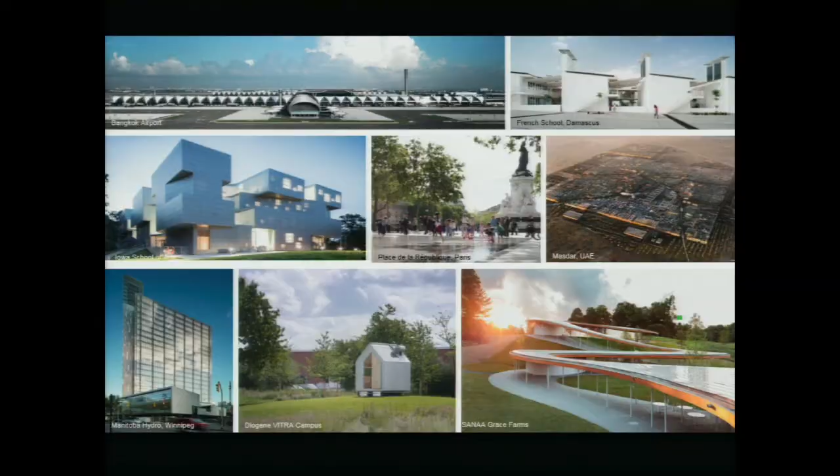Just to give you an overview of an array of projects we've been involved in - some of you may know some of them. Very small projects, like that little building at the bottom, which I designed together with Renzo Piano for Vitra, only 6 square meters. The idea is you can do everything in this: it collects its own rainwater, heats it up, produces its own electricity. You can sleep in it, work in it, it has a little kitchen, a bed, you name it - all on 6 square meters.

We have built several prototypes, but the idea is that Vitra is going into series with this product. They typically build chairs, so they consider this kind of furniture, rather large furniture of course.

From very small projects to very big ones - Masdar City, most of you have heard of that. Kind of controversial, and I'm not going to talk about that, but really the questions we addressed were how do the winds go past or through the city, questions that have to do with street width, urban layout, building height, orientation, solar radiation hitting various aspects of the facades, interaction with daylight, and of course how you can produce sufficient energy in that city and integrate that production to operate it.

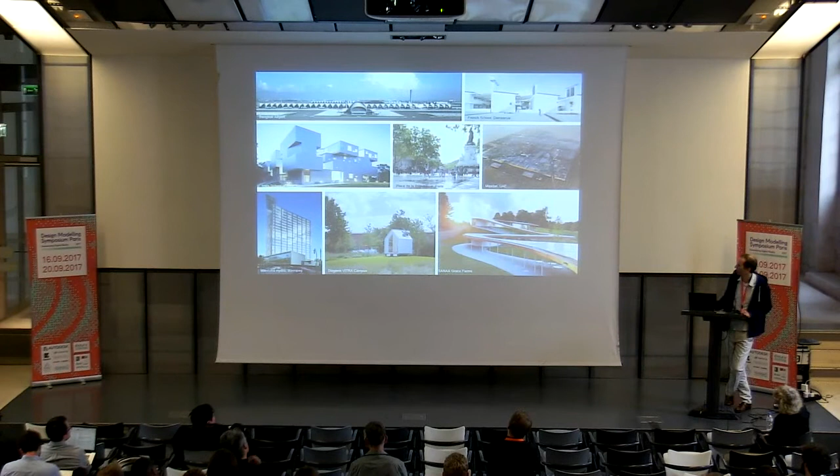Well, while we have only a very small stake on every project, we are involved in a lot of projects, but not enough. We have a mission to make buildings more sustainable and energy efficient. And because we can be involved in only so few projects, rather than spreading the message into the world, we decided to get what we call the majority world to Transsolar, and founded the Transsolar Academy.

It's basically a scholarship for 6 to 7 young engineers and architects who stay with us from all over the world. They come to us every year for a whole year, fully funded. This year we have a guy from China, a girl from Cuba, Greece, Argentina, South Korea, Syria, Zimbabwe, Vietnam and India, and it's very inspiring to work with those people.

I just had a session with them last week about their future, and whenever I have a philosophical question, for instance about models and tools, I have very interesting discussions with them. Not only do they have very different cultural backgrounds, but also different backgrounds in terms of education - some of them are engineers, others architects.

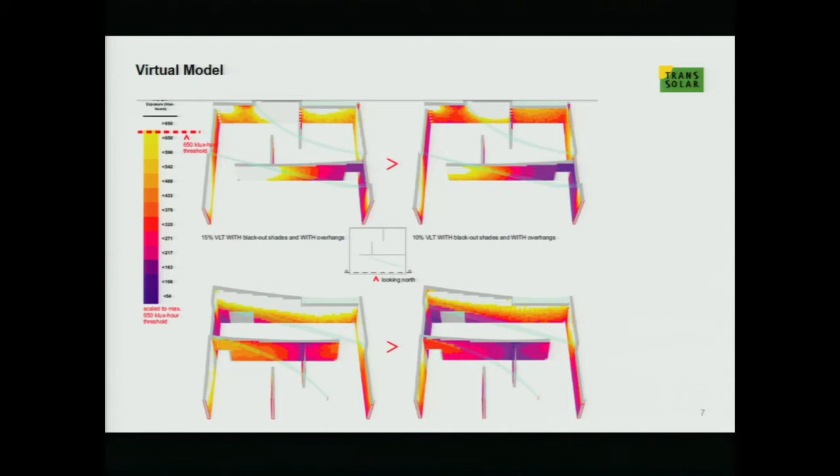So we often ask ourselves, should we do a physical model or a virtual model? I personally have a more virtual background. In fact, the world of aerodynamicists is divided into physical and virtual, and you rarely find someone making a living with both - wind tunnel and computer work. With those guys, we have discussions about what models are appropriate, and we've kind of agreed, at least in aerodynamics, that there's some coexistence between computational tools and people who pursue computational tools as opposed to physical tools.

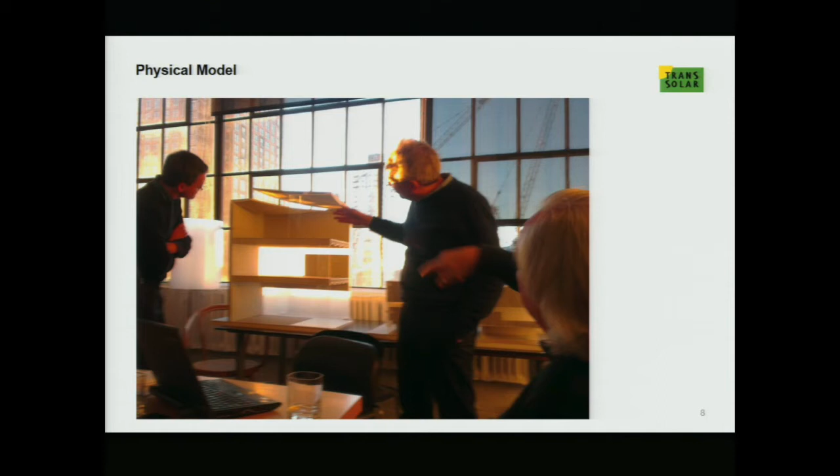So this is an example of a daylighting study in a museum - a museum in Houston with Steven Holl. Of course, you cannot replace a physical model with only computational consideration. So in particular for that museum, we are building a 50% mock-up. These are early days, just holding a model against the window, learning from the very simple interaction with the sun.

So finally, I can show you a real photo of what you see on the left, a model. I've been showing this for the last 3 years, only the left picture, but last week the Zaryadye Park in Moscow was opened.

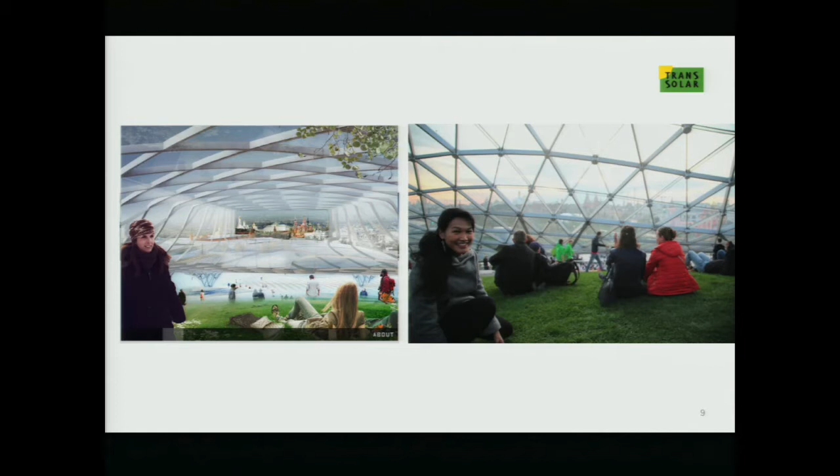It's a park similar to Tianjin that you just presented. We thought about the climate a lot, how people will interact with the environment. Moscow, of course, has a very harsh climate, especially in winter. So we wanted to play with this, create super climates, anti-climates.

There's an ice cave actually, operating the entire year. The vision was really that there's a hill, and on top of that hill, we have a shelter. It's open, accessible all year round, and even if it feels cold outside, it feels warmer on top of that hill. We know warm air rises. I'll talk about this a little bit later.

But to get from that vision, that notion, that mental model, to a real building, a lot of models probably have to happen in between. And that raises really the question: what is a good model?

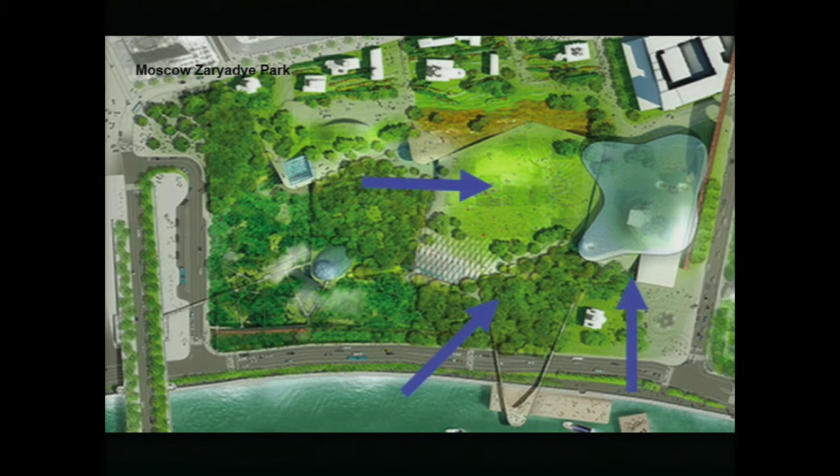So it's very, very central in Moscow. If you ever have the chance to visit, already on opening day it was treated a little bit controversially. Of course, it's an outside park, a park for the people. But of course, from an urban point of view, it's also very brave to actually build something like this.

But this is a rendering. So we looked at the winds, the prevailing winds mostly coming from the southwest, but also west and the south. And you can see here on the right-hand side this huge canopy, around 15,000 square feet.

On top of a hill, under that hill, there's a Philharmonic. Under that Philharmonic, in fact, under the entire park, lies a very, very big secret. No one knows what's under there, me neither.

Anyway, so there's a topography, and we try to understand really how the winds will interact with that topography. That was kind of the original idea.

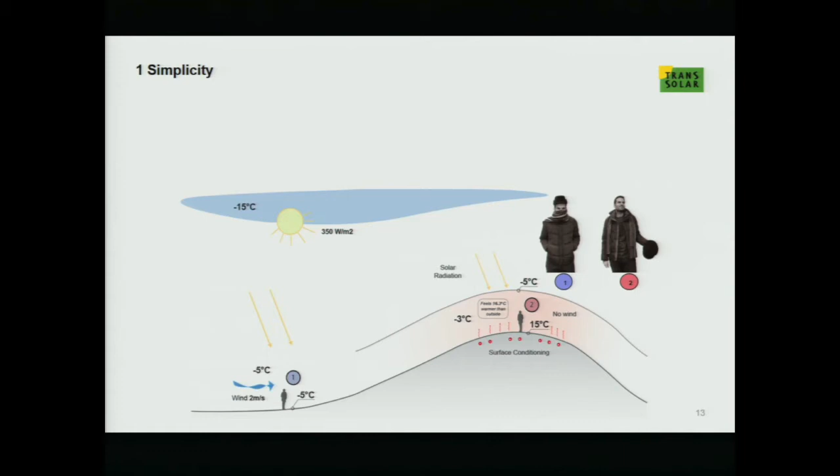So imagine you're outside, it's fairly cold, maybe minus 5 degrees. You walk up that hill, the sun traps solar, the canopy traps that solar energy under a glass crust, like a greenhouse basically. And as air is rising up, in the shape of the bubble, that warm air cannot escape, unless, of course, we have wind taking that away.

So the key was really accessibility, not to close this off, to have this an open kind of structure. Originally, we intended to also find some waste heat from the Philharmonic to maybe also introduce into that space. But right now, this is only passively heated.

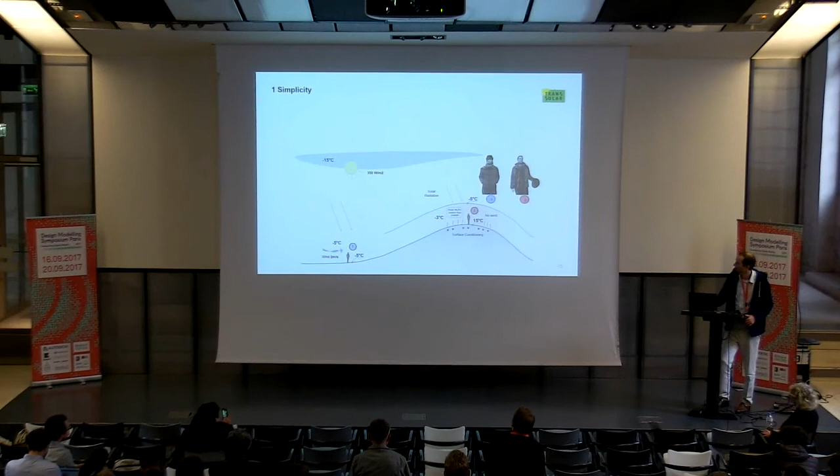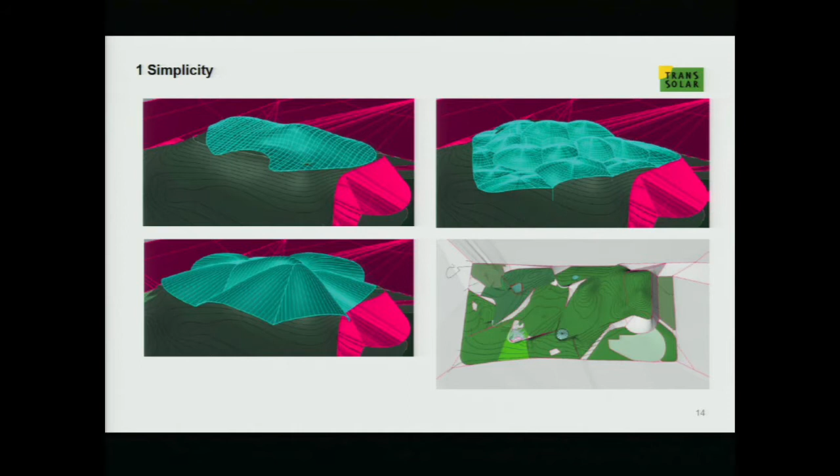So the architects came up with all kinds of different shapes for that hill, shapes for the canopy, and asked me what's really the best to achieve our target of having a wind-sheltered, open greenhouse.

So we did what you then always do. You do some CFD. It takes for each of these a couple of weeks of a highly paid CFD engineer, and then you look at the results, and really you didn't learn much from this.

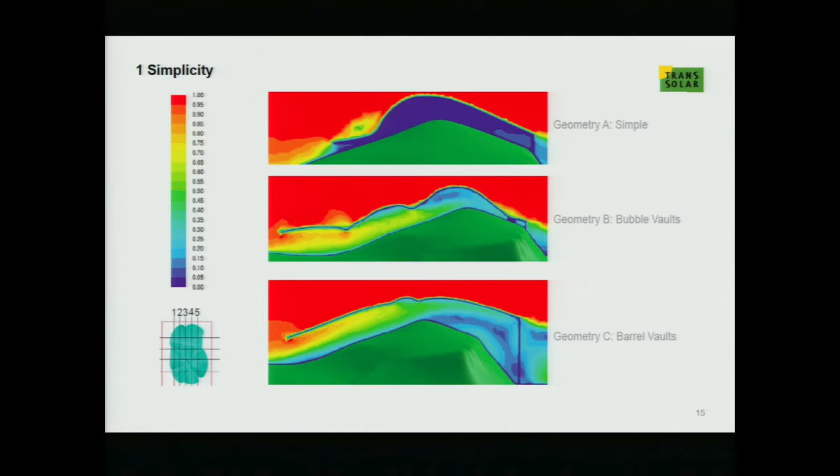So what does this mean? It's maybe the simple geometry versus the bubble vault or the barrel vault. How should we interpret these results? How can we develop them further?

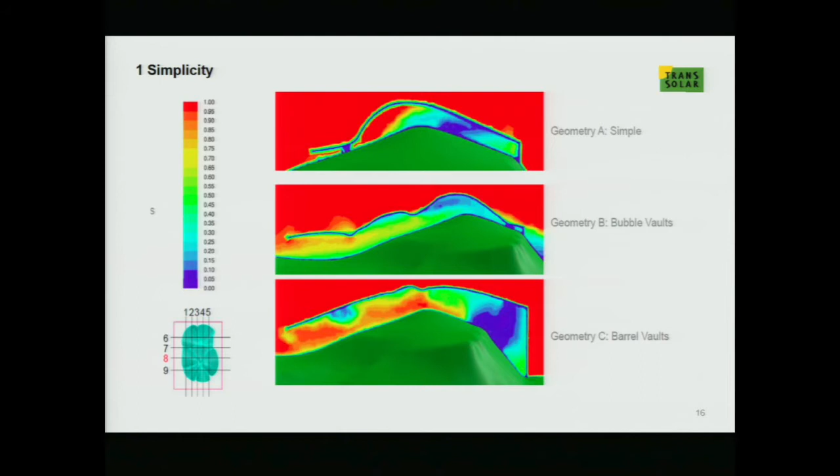Especially if the wind turns a little bit, even if we could make sense of this, even when the wind turns slightly, the situation may look totally different. So rather than sticking to this complex idea that we need to solve a certain future reality, we ask ourselves, okay, can we reduce that complex model to a more simple approach of addressing such a canopy?

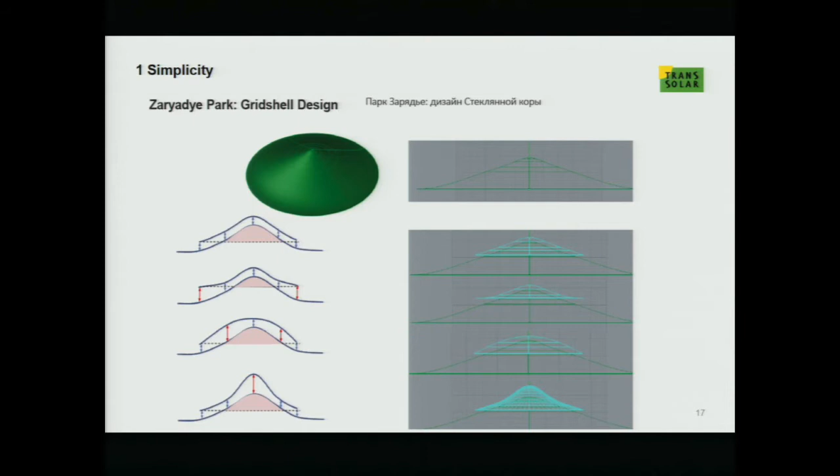And we did that by introducing a cartoon-like hill to begin with. So if you ask a child to draw a hill, how would this look like? And then we started by just defining a canopy that's parallel to that hill, and then came up with a set of parameters, only 3, not more, to understand really the relationship between such a canopy and a cartoon-like hill. So probably the edge is relevant, where the wind could enter, but maybe also the top of the hill where the wind could disperse, and maybe somewhere in between.

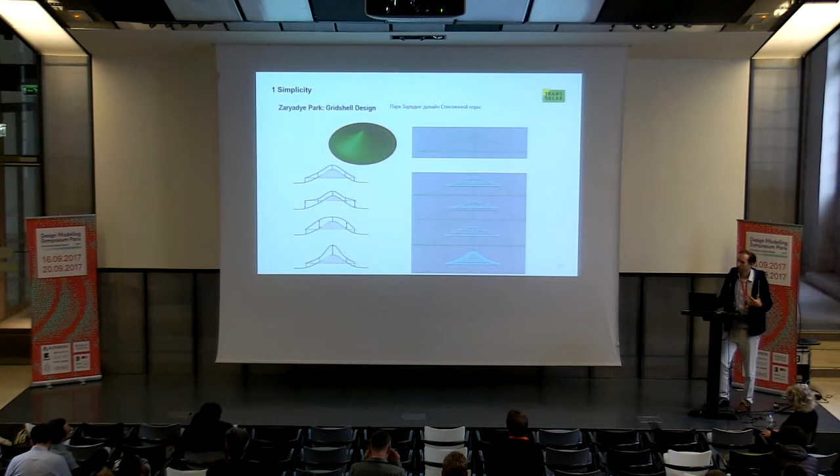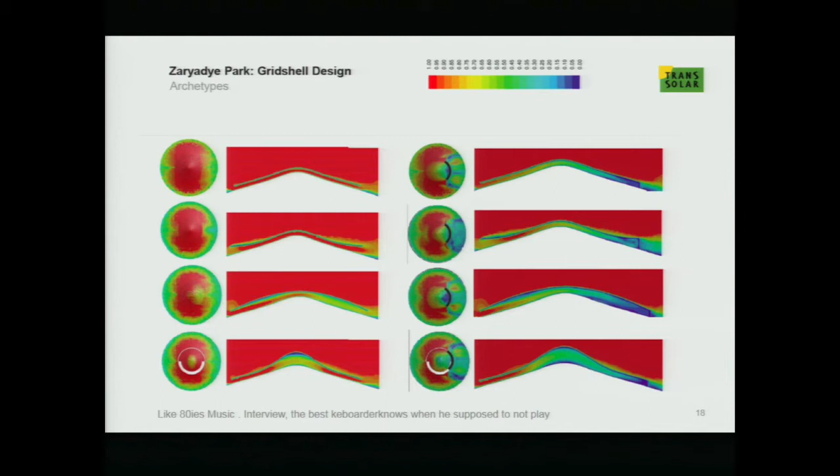So it's a strategic decision to reduce the complexity of such a model into something that not only we can handle, but also learn something from it. And then you come up with certain rules, let's say design rules, rather than facts, that the architects would be using to shape their canopy.

So only then, actually, after understanding the dynamics of the wind, after feeling comfortable with what's happening to the wind, we ask ourselves, what does that actually mean for people finding themselves under that canopy?

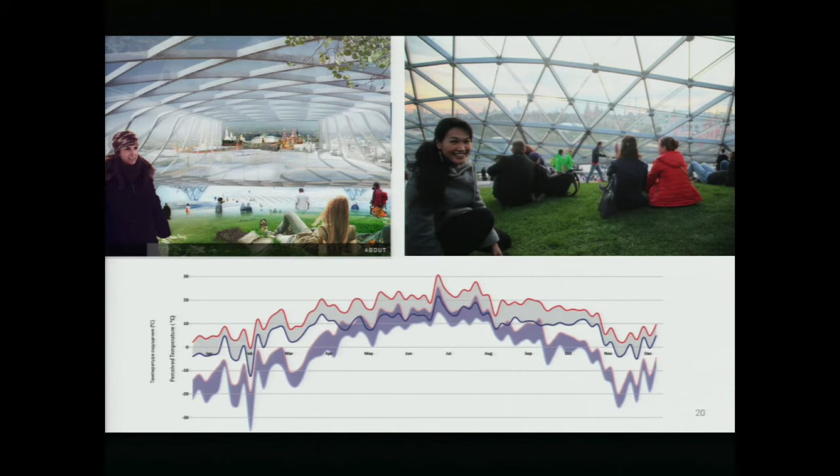Of course, it also has to do with other factors: humidity, sun, what people are wearing. The fact that they're actually climbing up a hill will make them feel even a little bit warmer. And then we take all that information into one human thermal comfort model, and try to understand what the perceived temperatures under such a space could possibly be. So the purple colors, that's more outside, whereas you then have the elevated temperatures under the sheltered space.

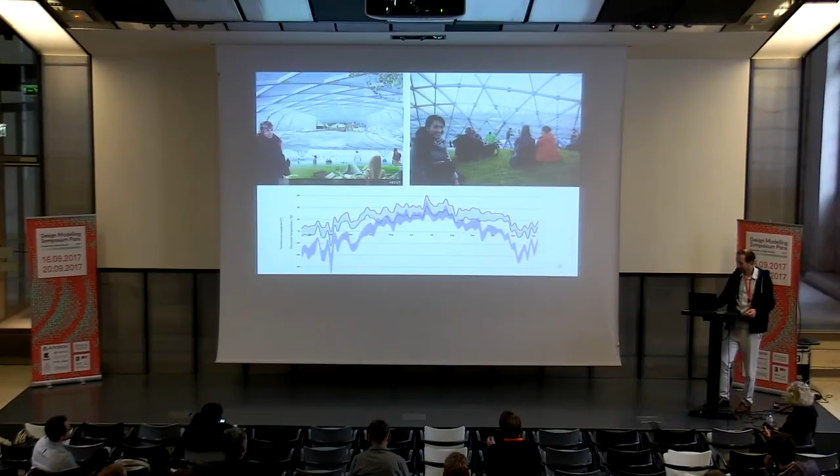Simplicity can also be found, I think, in this model. It's a model, it's an installation that we've done with a Japanese architect, together with Sanaa, in 2010 at the Biennale.

The idea was to create an indoor cloud. And little did we know at that time that what we were going to create was actually not a cloud, but, I think, a model of a cloud. And I want to show you why I think that is the case.

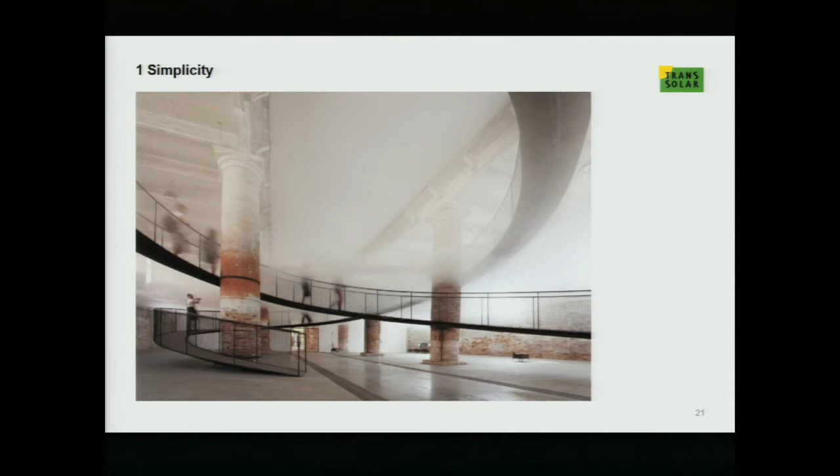So normal clouds, the ones that you fly through in a plane, are of course three-dimensional objects. So they have a complexity that meteorologists like to refer to in cryptic coding using complex Latin categorizations, in order to assign them to different weather phenomena. It has to do not only with humidity, but also pressure, air movement, winds. We all know how difficult it is to predict the weather, let alone to model it.

So in that sense, what you see here is a simplification, in the sense that it's actually only a one-dimensional cloud, in the sense that the atmosphere changes only as you go up. So the idea behind that is you still have a warm and humid layer of air, and a cold layer of air, and as they interact with one another, droplets start to condensate and find themselves balancing in a certain layer. It also has a little bit to do with the fact that humid air rises, humid air is actually lighter than dry air. I will talk about this also a little bit later. So it's a very much reduced, static model actually of a cloud.

You also know that clouds are very transient phenomena, so they change continuously. The idea here was really to have a stable layer that's floating, a stable humid layer floating between two rather dry layers.

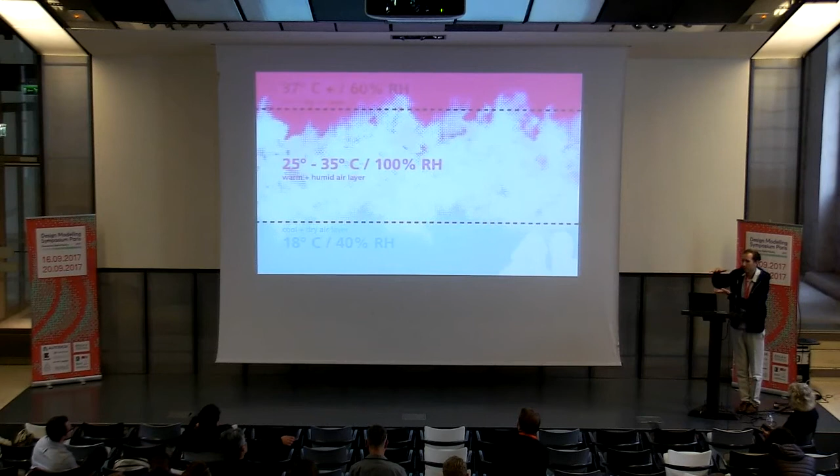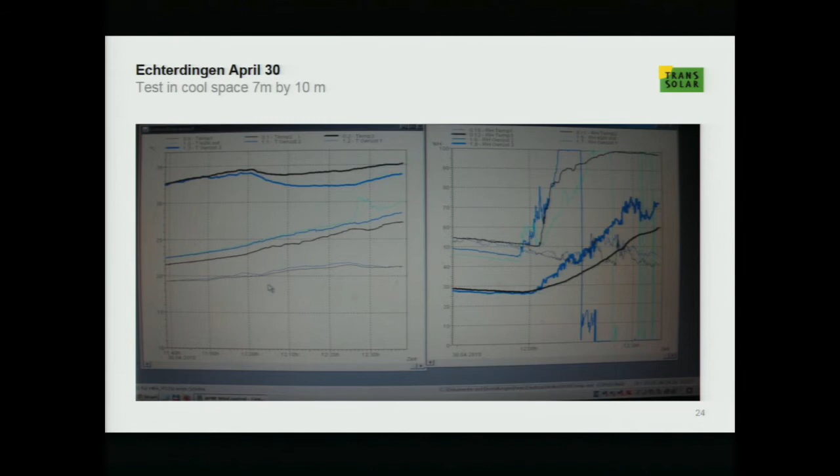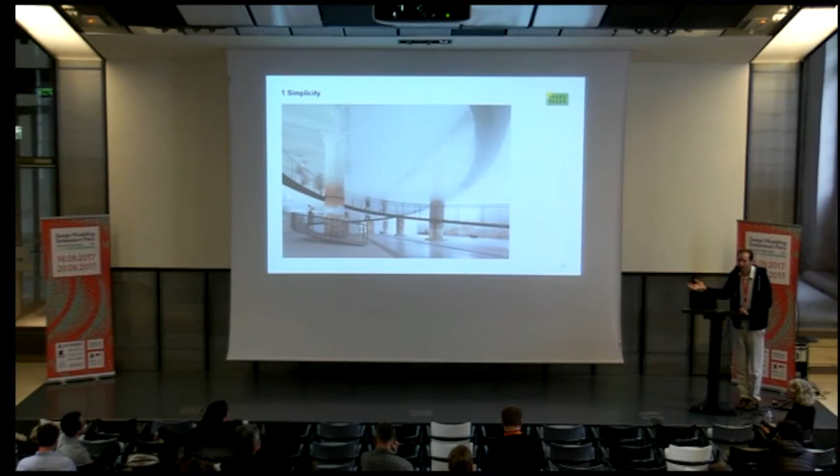So, as I would say, a physical model, physical representation of something that we know from reality.

Here, a virtual context. That's the Academy Museum of Motion Pictures, currently in design with Renzo Piano. Actually, they already started construction. Parts of that are being renovated. That round bubble is a new build. It's actually a movie theater.

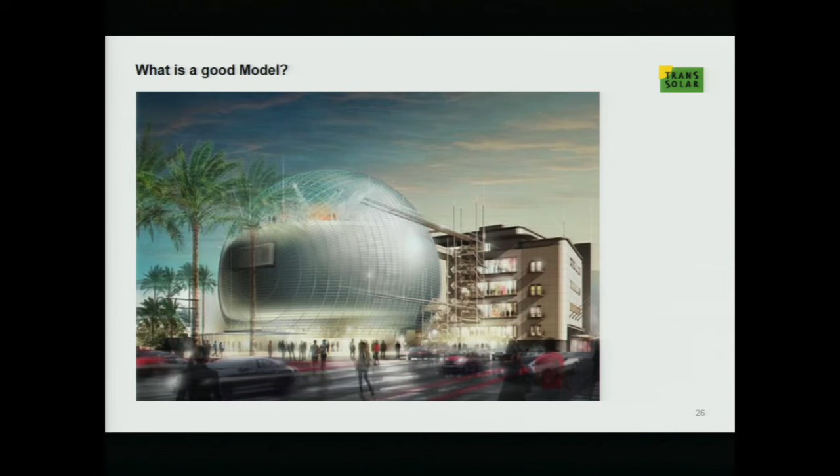At the bottom and at the top, it's somehow similar to the park in Zaryadye, an outdoorish, let's say, buffer space that's protecting people from rain and wind, and maybe from cold, but it's not fully enclosed.

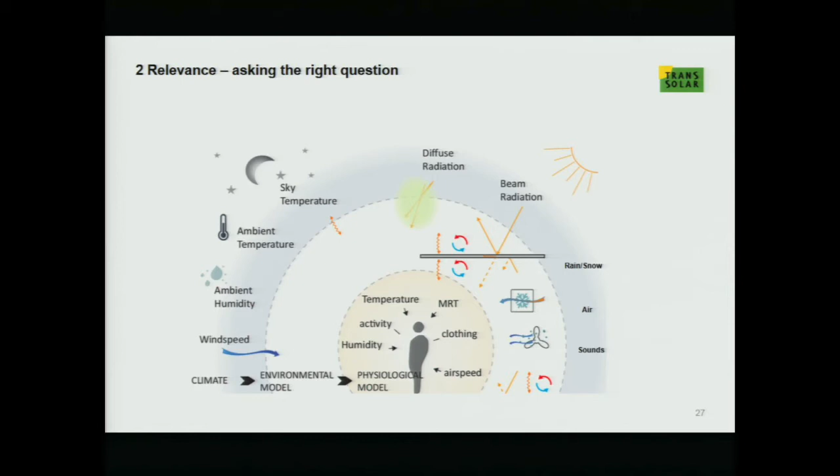And that brings me a little bit to what I think is the second aspect of what makes a good model, actually, which is asking the right question. And the right question here is probably not how can I build an enclosure, a fully enclosed space, in order to satisfy the needs for people, but how can I actually achieve thermal comfort for people. It doesn't necessarily have to be a fully enclosed building.

Actually, I keep being asked for the non-building. A lot of architects like the idea of a no building or zero building. Those are the aspects that are really important to understand what makes a person feel comfortable in a certain environment. Whether that's outside or inside does not actually matter so much.

I actually think if a person can relate to the outside, there is a mental shift happening that will relax people more and adapt them to, let's say, a wider range of environmental parameters. So, but it's not just wind; it's also something most people do not know.

It's, for instance, the temperature of the sky that's surrounding you. The sky has a temperature. It's actually the temperature of the atmosphere, but you can think of this as a surface, typically colder than our air temperature. And of course, air movement. You know all of this from your own experience.

So also here we did some CFD modeling. Not only CFD modeling, different models. Again, simplified, reduced models in order to understand the interaction with the space, in order to really understand the relevance of the key question, which is thermal comfort. Not how big does the chiller have to be. What is it actually? What kind of comfort do we want to achieve? And can we question that comfort actually?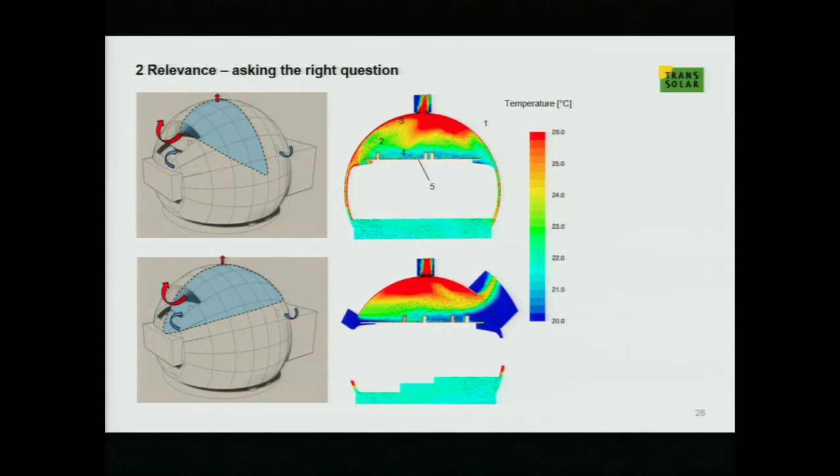So to come back to the cloud, what are the relevant questions for a cloud? What can we gain from a physical model such as a cloud?

And because we were interested in that concept of perspective, being below, in between and above, we at some point realized we want to take that question a little bit further, because actually there are very few situations where you can see all those three moments at the same time, because you're either under the cloud, in between the cloud, or above the cloud.

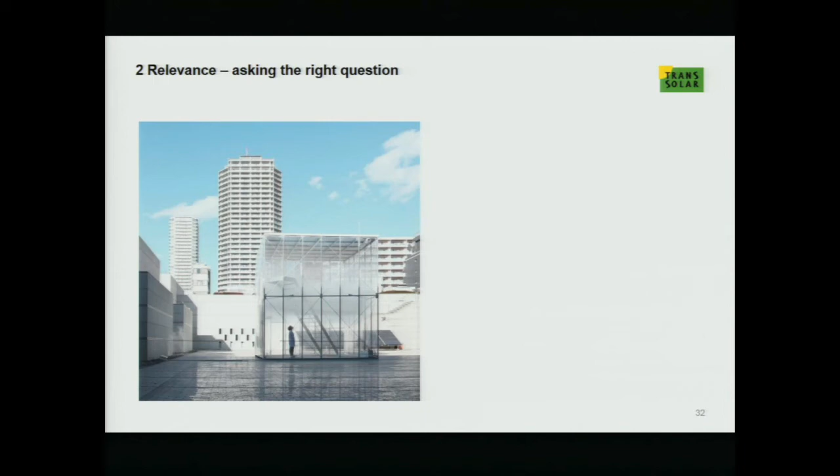So you know this from probably when you're, let's say, in the mountains, you can probably experience also seeing all three layers of cloud as the cloud is farther apart.

So I think this is an interesting moment that you experience here in Tokyo, where we did, let's say, an alteration of that installation, where it's enclosed in a box, where from outside you can actually see all those three layers at the same time.

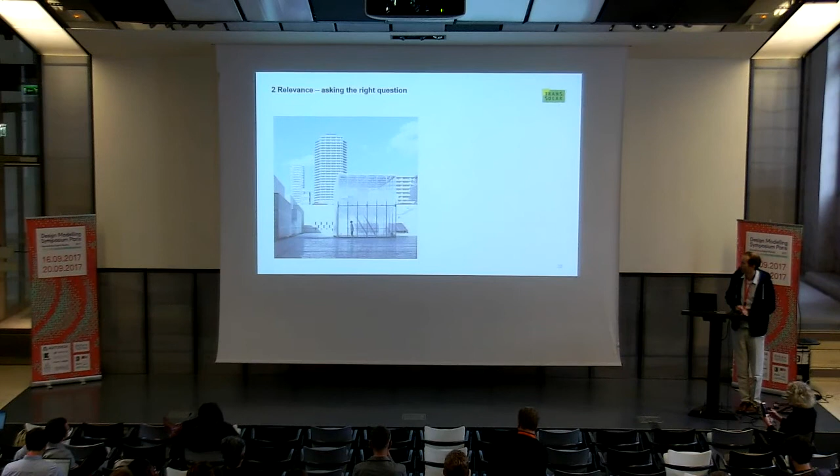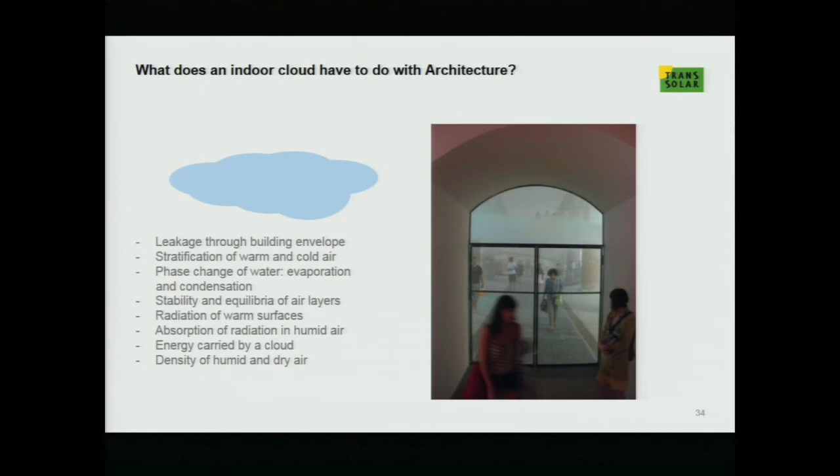And again, of course, you would be able to experience these different atmospheres as you walk through. So, sometimes I'm being asked, why do you guys do clouds? What does that have to do with architecture? So here's just the list if you're interested in it.

My third point, or third aspect of what I think is an important property of a good model: it should allow you to discover something, of course. So we have now asked the right questions. Hopefully we'll find answers to those questions.

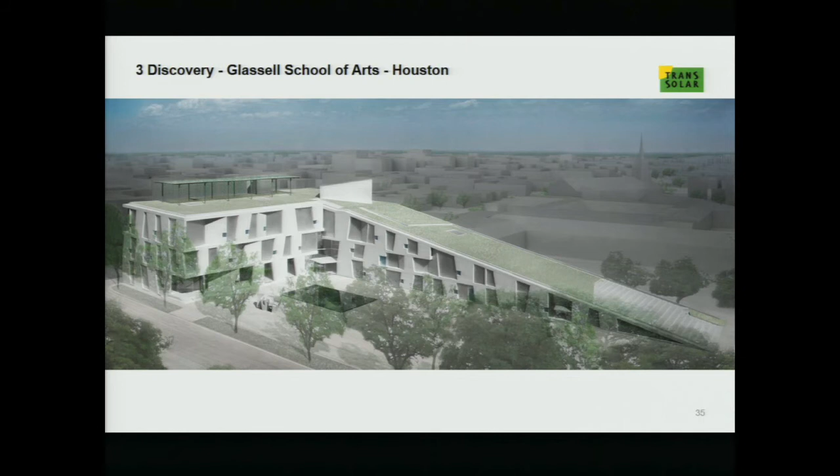Speaking about the cloud, here you see an art school in Houston that we're designing together with Steven Holl. Houston, very humid, of course. So there were certainly lessons we could take from that cloud into the Houston climate to understand really the thermodynamics of humid air moving.

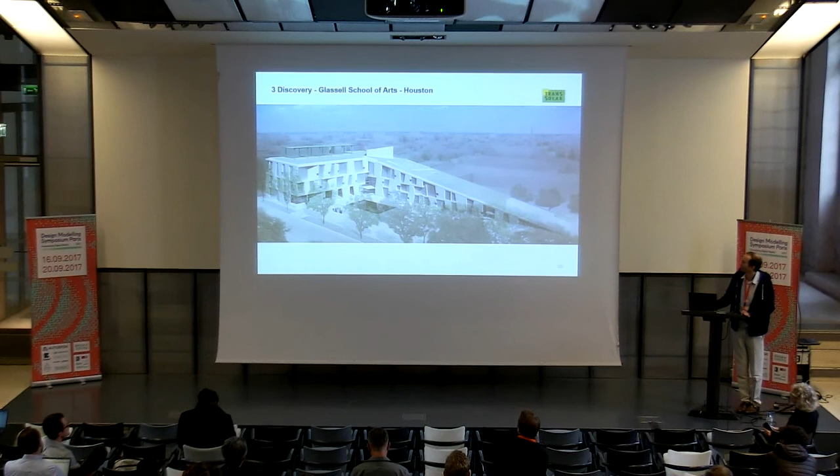By the way, the school has been just slightly damaged in the construction process, but I think they're on track. Talking about Harvey, I will also talk about hurricanes later.

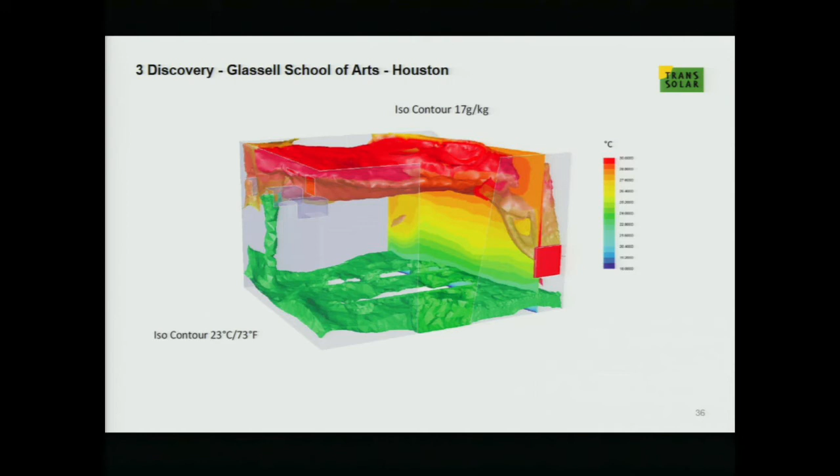So this is a CFD that takes really everything into account, not everything, but quite a lot of the dynamics of air, humidity, radiation, momentum, turbulence, and so forth. The question was really, what happens if a student opens a window and humid air enters that space? Will that cold floor, which actually has radiant cooling, in a humid climate, get condensation because the humidity is getting in touch somehow with that cold floor? And that CFD shows that the red, the warm humid air, is really rising because of the humidity, not only because of the heat. Humid air really is lighter than dry air, is rising and can then be extracted, naturally or mechanically. Doesn't really matter, but would not get in touch with the floor. So, one example for discovery.

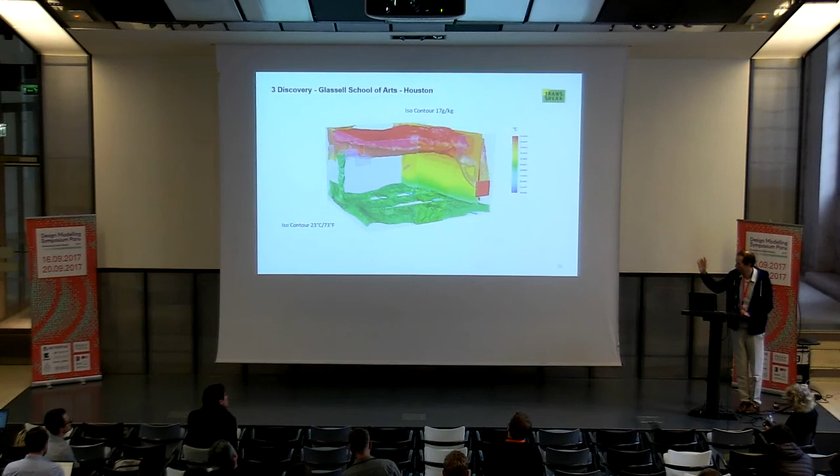Another installation, interaction with humidity, is the Cloudscapes installation that Matthias Schuler from Transsolar has done last year at the Biennial. Some of you might have seen it. A lot of lessons learned from how light is being made visible, basically through humidity. Also about the different distribution of light in space.

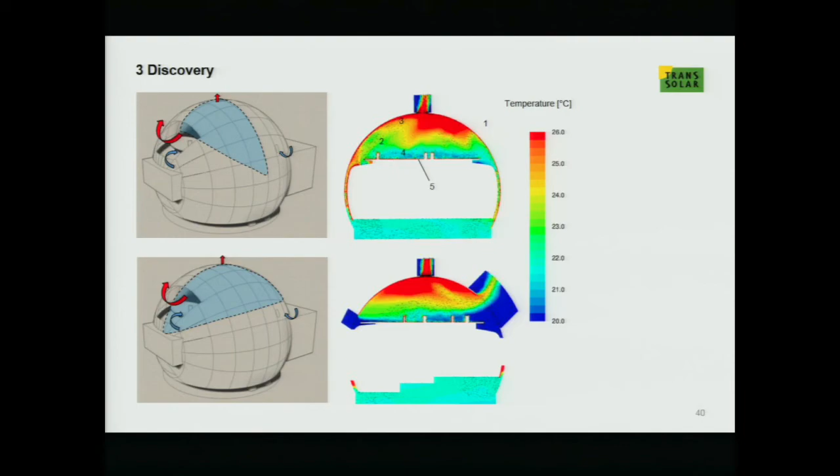And certainly there were a lot of things to discover in our museum for motion pictures in Los Angeles, about interaction between winds. This is actually now a thermal model. Originally, we had excluded the thermal component in that model, but you can see here very nicely the stratification, how cold air is actually entering, finding itself at the level of people, whereas warm air is being extracted a bit more away.

That brings me to my last point of what I think makes a good model. I like it if there's a moment of surprise in the process of going for discovery.

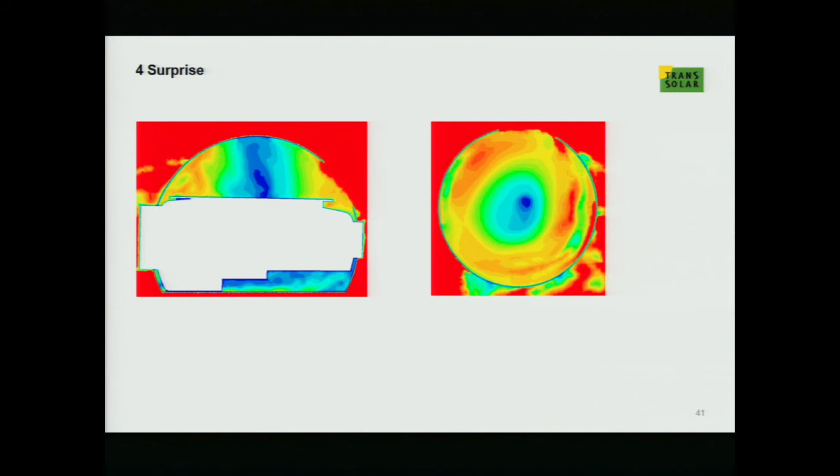Some surprising effects we saw here actually in that computational analysis, that when the wind is somehow tangential to this opening of that buffer space, you have somehow some hurricane developing inside the space. Whether that's good or not is a different question. In summer, probably it's nice - you could create some, you could maybe even design the installation according to this little vortex that you see here. In winter, probably you want to protect yourself from it, by maybe strategically placing objects into that hurricane.

And a similar effect of surprise we also experienced in the Cloudscapes installation. During one of our tests, a group of kids was running in a circle, like they were holding hands and running around, and you could see how the air would start swirling around, and a negative pressure would form in the middle, and the cloud would, like a tornado, basically come down, and remain there maybe for half a minute or so, and then slowly stabilize itself and go back up.

So it's those moments of surprise that initially you feel you don't want to see, because it questions the way you understood a certain situation beforehand. But I also think that it's exactly these moments that allow you to go a little bit further and actually learn something about the matter at hand.

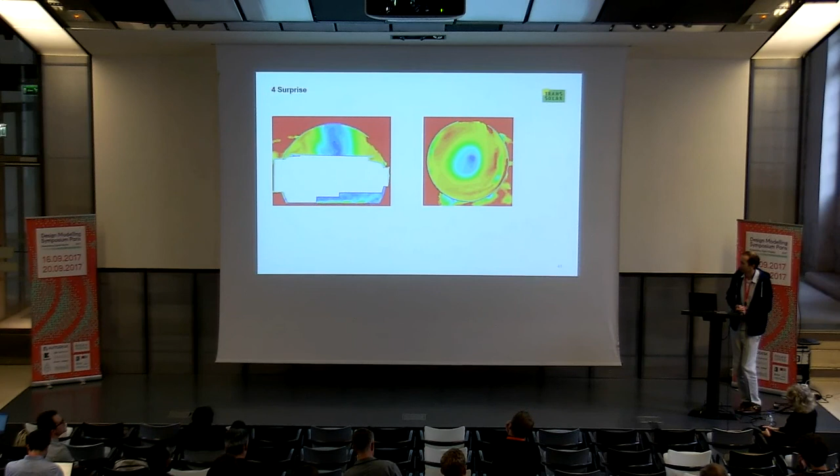So just to summarize, this is what I think makes a good model: simplicity, relevance, addressing the right questions, discovery, and ideally on the path to that, some surprising and inspiring moment, and probably a right balance of all of these will probably make a good story for a good model. We all know that there are beautiful models, there are beautiful stories we like to tell. It's almost like a movie - there are bad movies and there are good movies.

What those movies probably have in common is, I'm pretty much done, so what those movies have in common is probably some form of evolution, catharsis, but also progress. So I think if that balance is right between those pillars or dimensions of what I think makes a good model, we're able to progress, even if it's just a little step. Some people may call it evolution, others may call it transformation or involution. And yeah, with these words, I would like to say thank you.